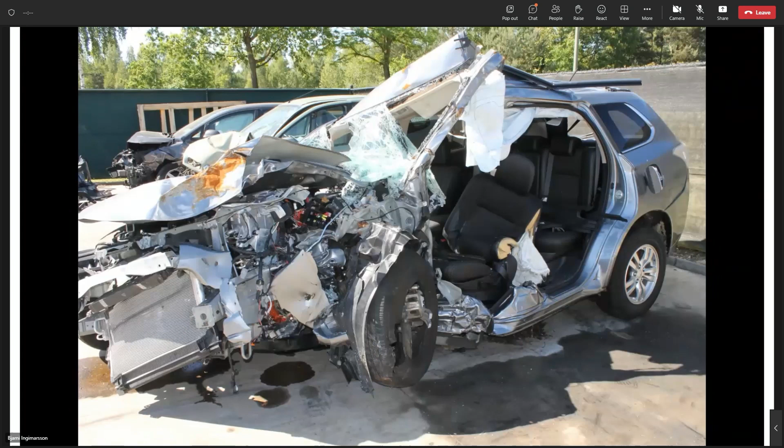What do you think? Are we ready for this, all of this?

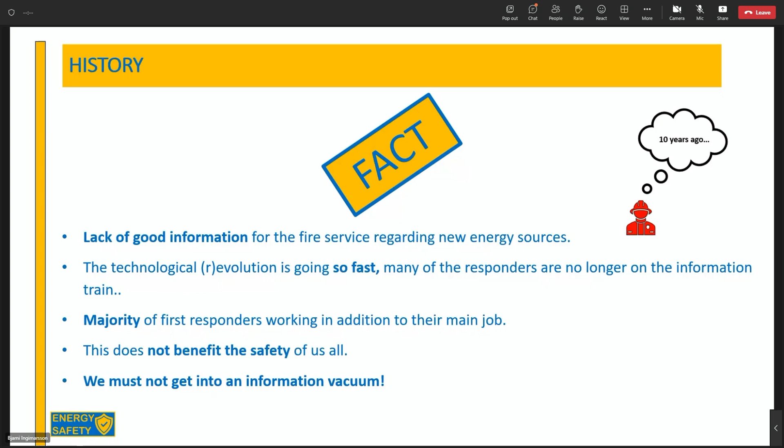10 years ago, I thought there's a lack of good information for the fire service regarding new energy sources. The technology goes so fast, many responders are no longer on the information train. So certainly the volunteer guys, they do their work as firefighter after their other work, so they have to be informed also. And that does not benefit the safety for all of us. This is not good. We must not get into an information vacuum, because that non-information will mean accidents.

So this is why my dream came to make one standard for responders. And who knows the rescue sheet and emergency response guides, do you know this, with those chapters? My idea is that we go to an intervention with one standard. Is it now an airplane, a train, a bus, energy storage systems? Everything in the same way, with the same symbols, with the same colors. This has to be, at the end, the purpose.

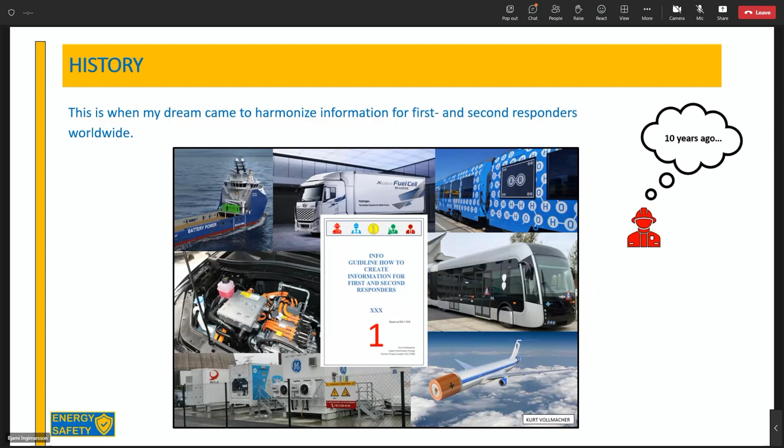And what has already been done? We have the standardized information by ISO 17840. These 9 chapters have been made as a responder thinks. If we go to an incident, what do we want to know? We want to recognize it, we want to know what it is. Then, if we know it, like a vehicle, how can we make sure this vehicle doesn't run away anymore?

That is still like a boat - how can we make sure it doesn't get away? A train, everything, it's always the same. And if we have done this, then how are we going to disable the direct hazard so we can do our work safely? If we have this, then how can we liberate the patients out of it?

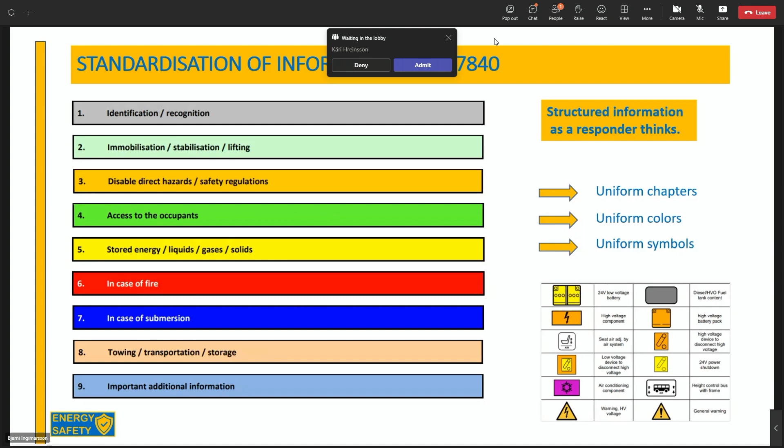Then what kind of energy sources are in it? What kind of liquids, what kind of gases, solids? What are we going to do in case of fire, what if this thing burns? And then, what if hydrogen is on board? What if methanol, ethanol? This is not normal, what's coming ahead of us. It's not only anymore gasoline and diesel, or electric, or hybrid. It's much more than that.

What about the case of submersion? I think you may remember what happened in the United States with all those electric vehicles that came in contact with salt water - a lot have burned. So what are we going to have in the future? A lot of rain, a lot of water. We have to be prepared for that also.

What are we going to do in case of towing, transportation, storage? What are we going to do with those vehicles if they have been in an accident, what are the dangers of this? And then in chapter 9, important additional information. We need to always have uniform chapters, uniform colors, and uniform symbols. Make it easy for responders, because it has to be easy.

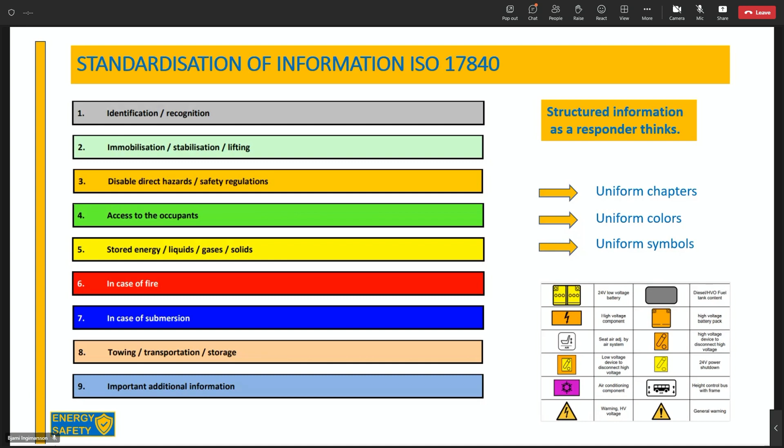The colors within the ISO standard are always the same colors. If you see orange in the rescue sheet, you will also see this on the cables. This is the same orange. If you see orange, you know you are dealing with high voltage.

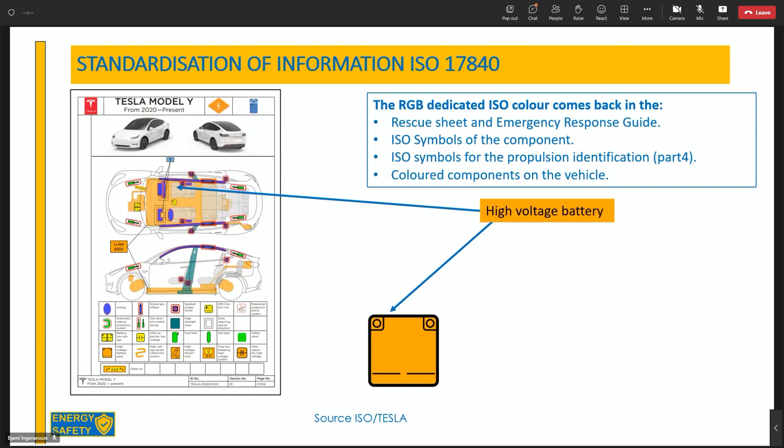The rescue sheet is made for quick information. When we made this at Euro NCAP, we said it must be not more than 5 pages, because you cannot read a book at the intervention site. You need quick information, but an emergency response guide has more in-depth information. What is the connection between the rescue sheet and emergency response guide? The chapters. If you want to know something, let's say chapter 6 about fire, you will find it in the rescue sheet very quick. Symbols, not much information. If you want more, you can go to the emergency response guide.

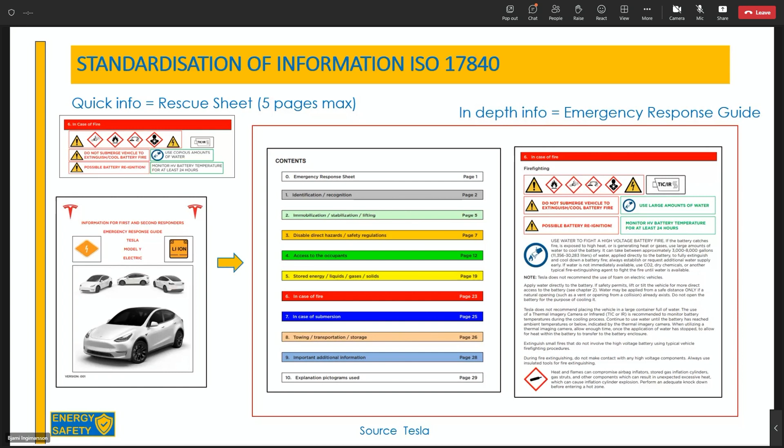I made this together with Tesla as an example to ISO, to show that it's possible to make a good rescue sheet and good emergency response guide. So this was an example. Then we have rescue sheets for cars, for buses, for trucks, always in the same way.

Okay, who knows these symbols? Have you seen this before? Who hasn't seen these symbols before?

When I made it, and my wife is here, I first showed them to my wife. And I said, what do you think of them? She said, I understand them. Then I know they are firefighter proof.

Because you have to make something simple. A firefighter has to understand it. And how it's built, the symbols have a background color. Gray is always diesel, red is gasoline, green is gas, white is cryogenic LNG, blue is hydrogen, and orange is high voltage. If you see one of those symbols from a distance, like an orange symbol, you know you're dealing with high voltage. If you see a blue symbol, you know you're dealing with hydrogen. If you see a white symbol, you know you're dealing with cryogenic gas. It's deeply cooled. Why white? Because it's cold, like snow. Blue is like water. It's tried to make it as easy as possible.

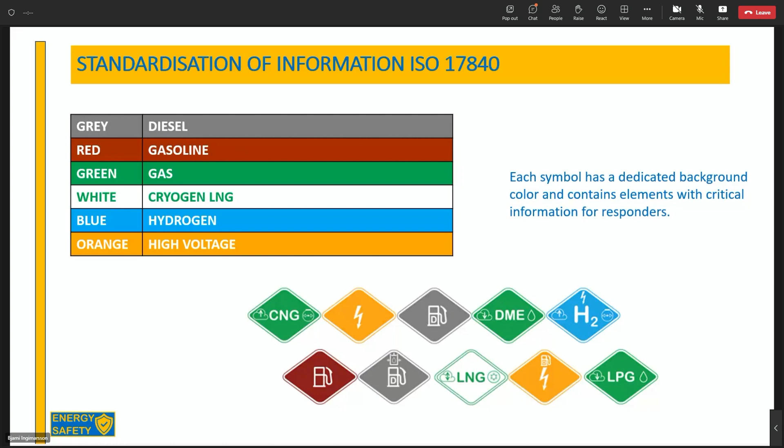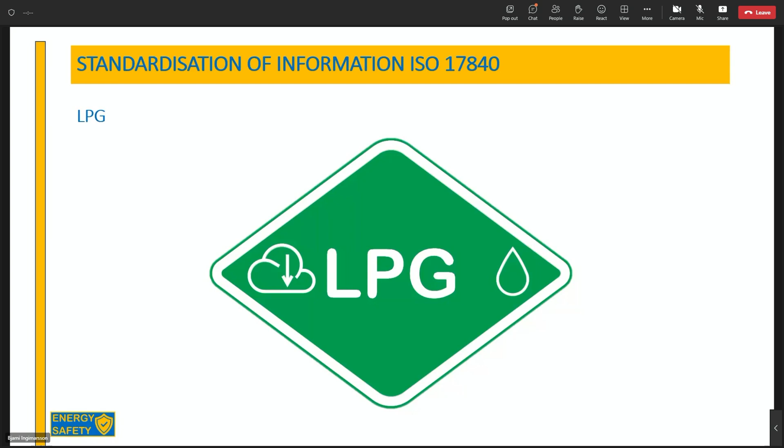Gasoline. Diesel. LPG has an arrow pointing down. Why this arrow pointing down? Heavier than air. And it has a droplet. Why? Because it's stored liquefied. So on the left you have the state towards air, and on the right you have the state of storage.

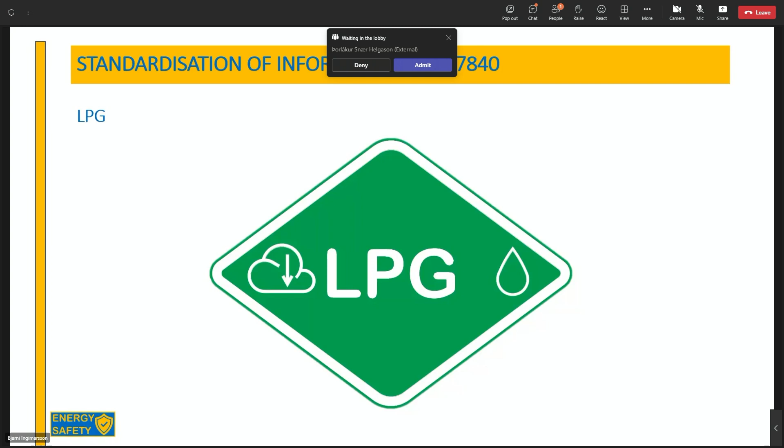CNG, again up, lighter than air, and then the other symbol - what should this mean? Pressure. Compressed, two arrows pointing to a point, compressed. Then we have LNG. Why should we have up and down? Depending on the state of the chemical. Yes, because if you have a leakage, it will come out in a liquid state, and depending on how much heat is on the surface where the liquefied gas comes onto, the quicker it will go up. So you will have both.

And then the cryogenic sign means it's deeply cooled. For LNG, it's minus 162 degrees. We already have liquefied hydrogen at minus 252 degrees. So this symbol applies not only to gas, but also hydrogen.

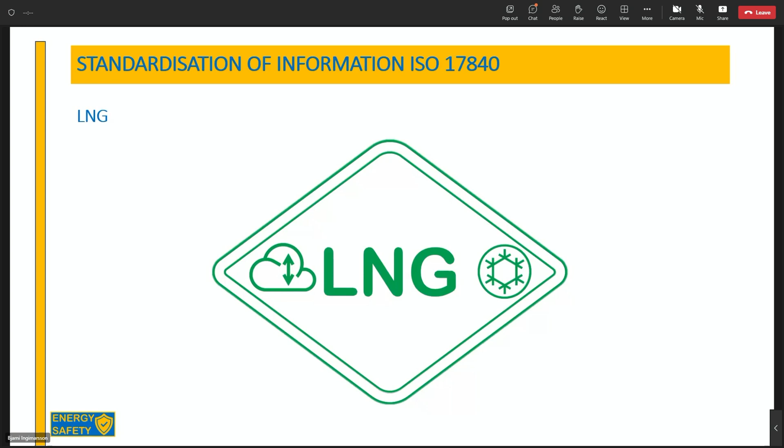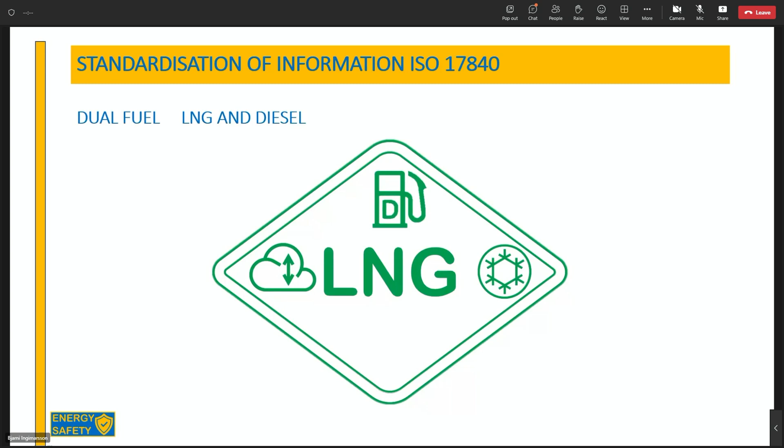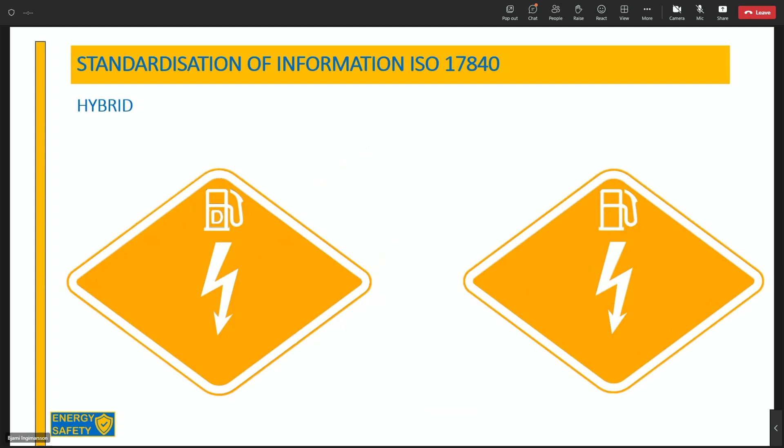And what is this? What should this symbol mean? Hydrogen, yes. Compressed? Electricity. Yes, electricity, because this is a fuel cell. What is a fuel cell? It means you can go to the station, fill up your vehicle with hydrogen, and within the vehicle there's a little factory that transfers your hydrogen to electricity. So this little factory makes your vehicle run on electricity by filling it up with hydrogen. So this is a fuel cell.

It means firefighters have two dangers. They have to deal with hydrogen and they have to deal with electricity. So in one symbol you see it all.

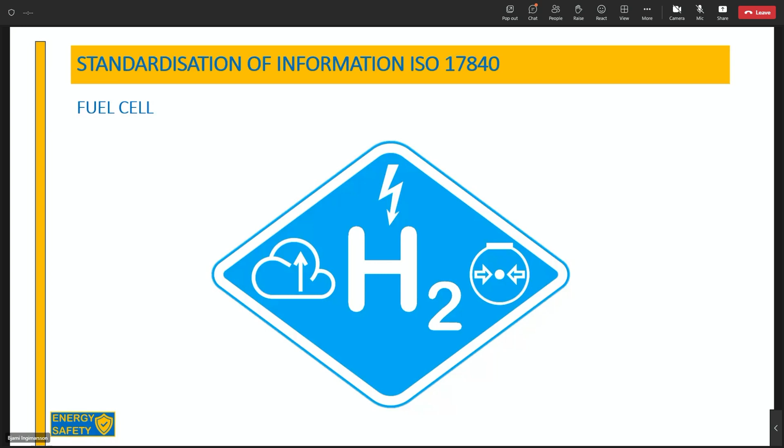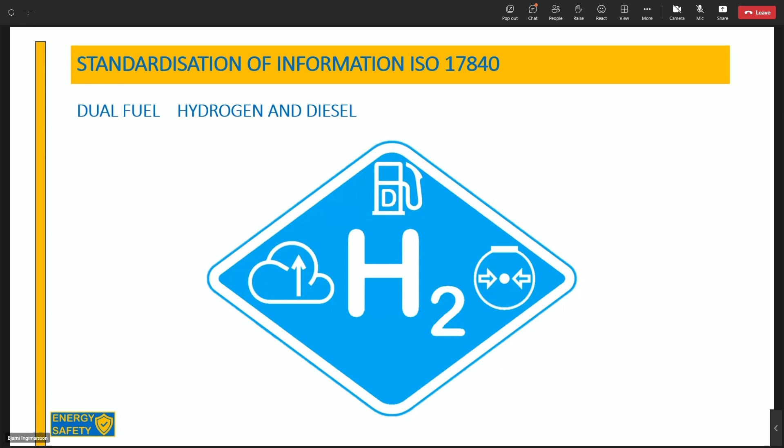Then the symbol is made so you can see from far away - if you see a green dot or a blue dot, you know what you're dealing with. The closer you get, the more you see.

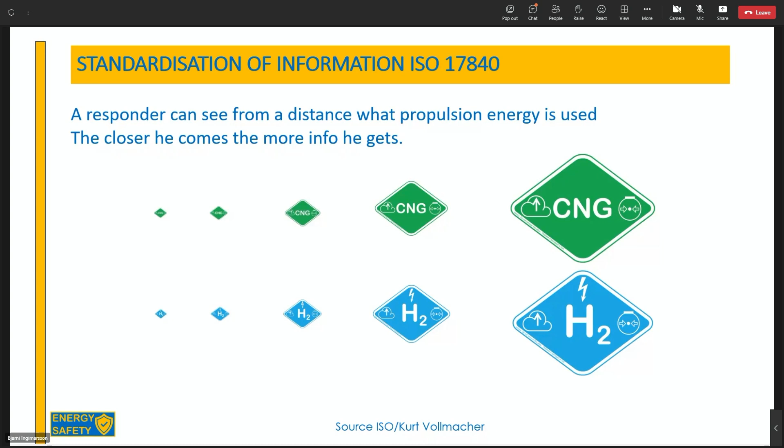And this is something we should also do in Iceland. I have seen you have buses on CNG. This is by my profession, I don't know, but the first thing I looked at was what kind of buses we have here. And this will be good for you, that you also have the signage on buses.

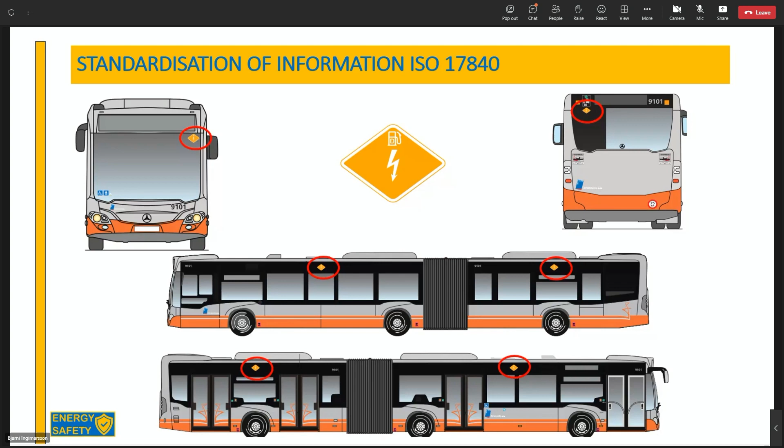We have done this in Belgium, and we have put the signage on buses in 5 places: front, back, the 2 sides, and the top. Why the top? For drones in the future. Because if this comes, a drone can fly away from your station to the accident, and it will send you the pictures or images from the accident to the command post. Before you enter the accident, you will already have the information.

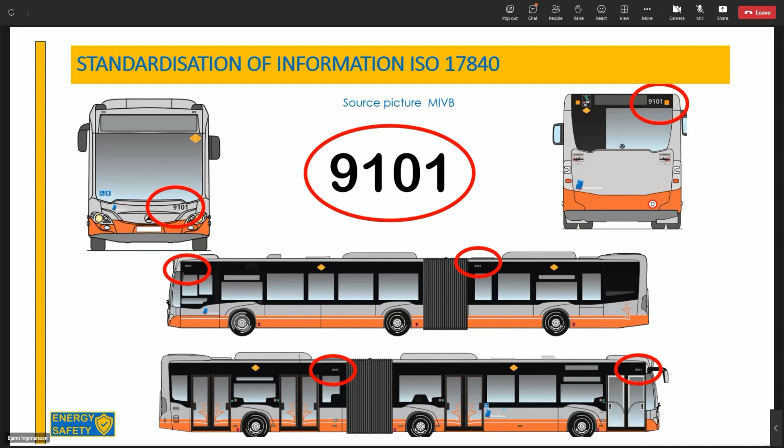Also, the number of the bus. Why is the number of the bus important? You can have the number of the bus connected to the rescue sheet. If you see the bus number 9101, you know, okay, this bus has this rescue sheet. Very important to know. This is what I mean.

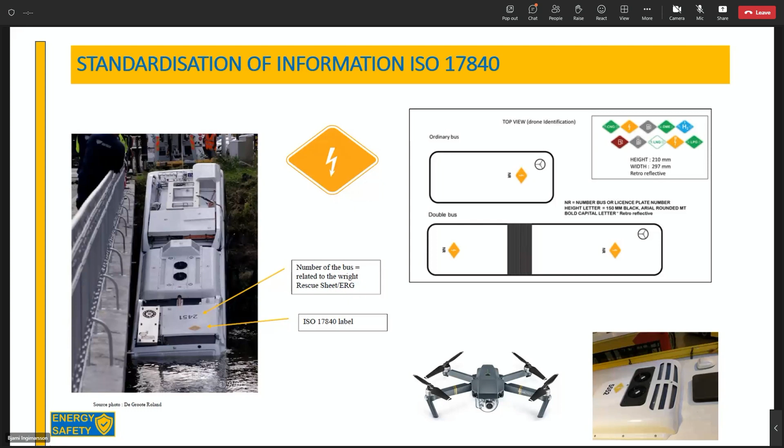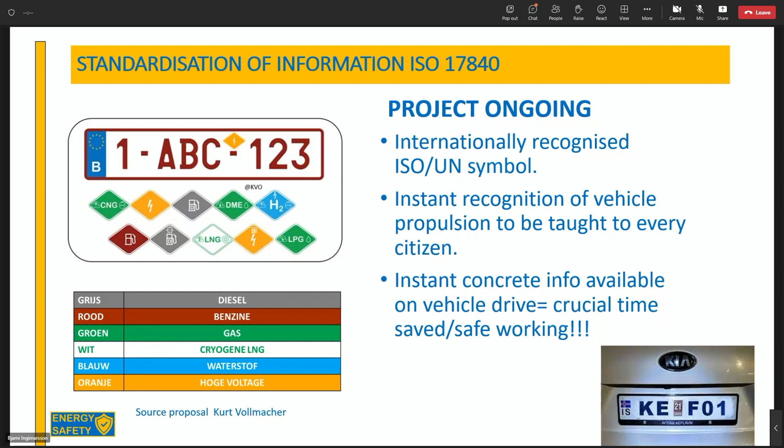And this is a project that we also try to do in Belgium: put the symbol on the license plate. I looked at this when I drove with the car over here, and I asked, what should be possible? Because there is not much space on your license plate to put the symbol on. But imagine this would be very good, because no one with a nice Tesla or a BMW wants to have a sticker on his car. No one. But if you can ask them, or the government asks, to put it on the license plate, maybe this is an opportunity to do something.

Euro Rescue app, I think most of you know this app. Do some people not know the Euro Rescue app? Most of you, I think, know it.

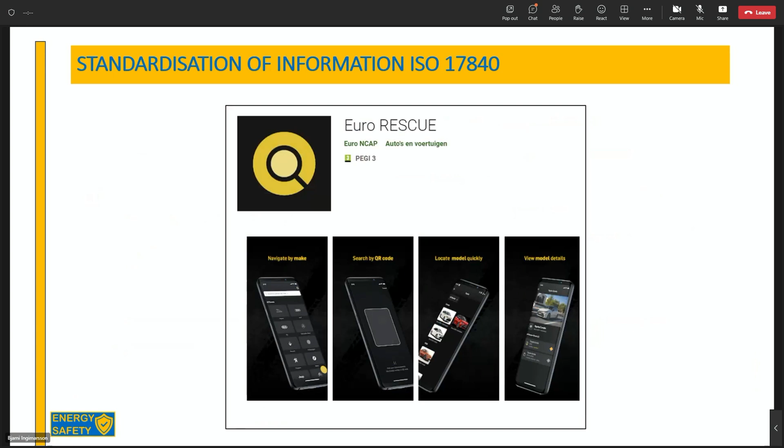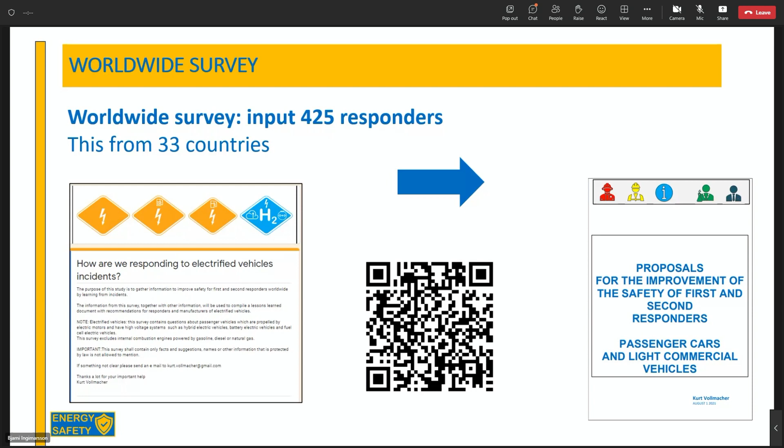A survey. I have done a worldwide survey with input from 425 responders. I also had good help from Bjarni on this. What were the conclusions? There's a need for clear recognition of the propulsion of these vehicles, so we need some symbols to indicate what kind of propulsion we have. There's also a need for uniform and globally available information on these vehicles, in accordance with ISO 17840, so we need standardized information about these vehicles.

A uniform, easy-to-operate disconnection system installed at the same place on all electric and other vehicles. So let's say if we could have a responder key to shut off everything with - this would be easy, but it's not so easy. But we try to make standardization in this way too.

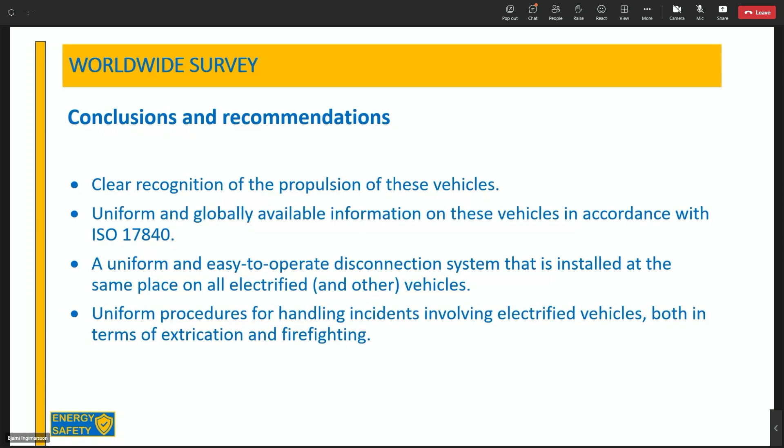Uniform procedures for handling incidents involving electrified vehicles, both in terms of extrication and firefighting. If a vehicle burns in Belgium, it's the same vehicle in Ireland, the same vehicle in the United States. It's everywhere the same. We can learn a lot from each other. This should be standardized.

Systems that make it possible to quickly extinguish the high voltage batteries of electrified vehicles - Perola has already talked about this. I will show you some things we are working on now at ISO to have standardization in this way too.

Safety systems and procedures to deal safely with high voltage stranded energy after an incident involving these vehicles. This is a very important thing you have to know. You can shut down everything, but in an electric vehicle you always have the high voltage. The stranded energy, this does not go away.

Let's say you put a vehicle somewhere for 5 months, and then you go control the high voltage again - you will still have high voltage. You can put it in the water for 3 weeks, and it's still possible you have high voltage. Be aware of this - this high voltage does not go away quickly.

The handling of electrified vehicles in car parks also requires treatment. I have seen the colleague - I said to him, it's everywhere the same. We need to think about how we can get those cars out of parking lots, because this is not going to be easy.

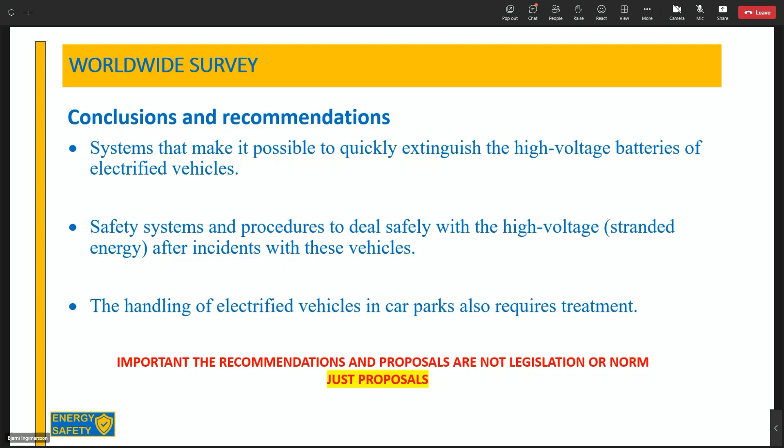Also important, these recommendations and proposals are not legislation or norm, they are just proposals. But we are working on norms.

These proposals are made to manufacturers in 10 languages. One very important thing, you always have to show a lot to manufacturers and maybe get something back. I was very happy that Audi has already taken over one of the proposals. They have already installed a connection to the battery pack where the responder can put an extinguishing agent into the battery.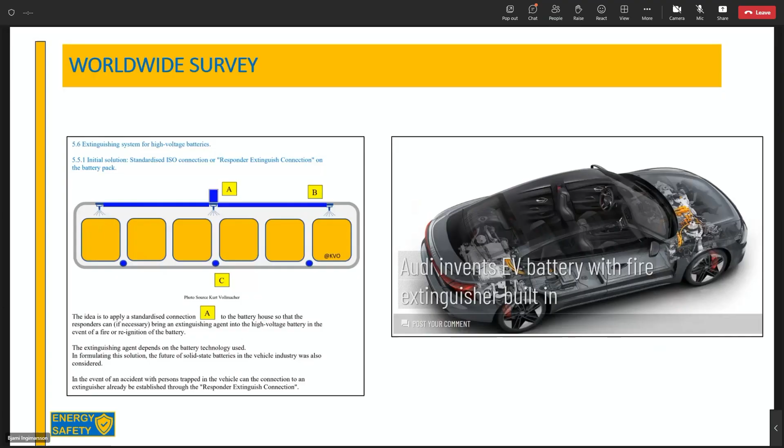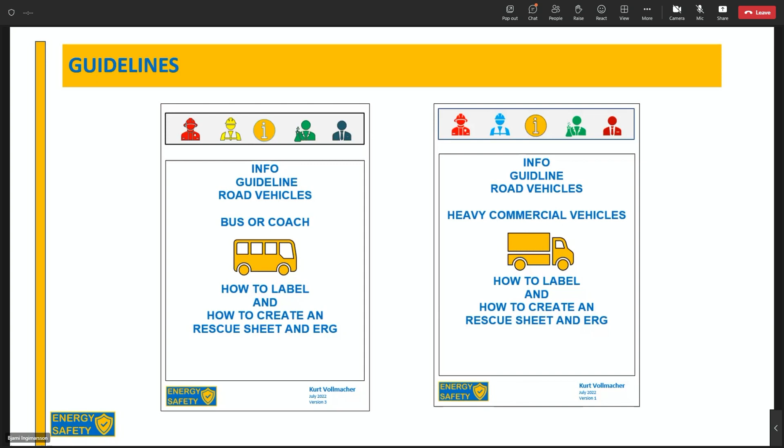So this was good, this was in the proposal, and Audi has already listened to this. There are 2 guidelines that manufacturers of buses and trucks can use if they want to make rescue information in line with 17840, so that you guys get the right information in the right way, with the right colors, with the right symbols.

Next step, what we are busy on: we are working with 7 working groups. One of the working groups, I'm talking also with Bjarni about this, is worldwide implementation of the existing ISO 17840 norm for car, bus, truck, and labeling.

This needs to be done in each country, also in Iceland. So what can we do with the existing norm to implement this in the country? Then there's a working group on energy storage systems, maritime vehicles, motorsport vehicles, air vehicles, railroad vehicles, and agriculture, construction, heavy machinery, and mining vehicles.

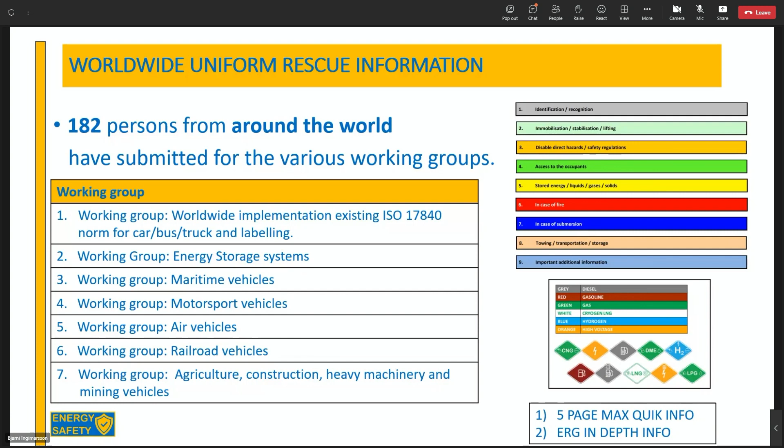There was a presentation of someone with machines, so there should also be a rescue sheet and an emergency response guide and labels, because we want to have, at the end, one standard: the 5-page rescue sheet and an emergency response guide covering all these things. Easy to understand, responder proof.

Next steps. There's a need to have a symbol also for 48 volt. 48 volt is not high voltage. It's like the system that we know, like start-stop systems. This is not dangerous for us for electrocution, but dangerous for us for having sparks.

Because if you cut into this, you can have sparks. So it's important to know this is not high voltage, but it's a vehicle where you can have a thermal risk from arcs.

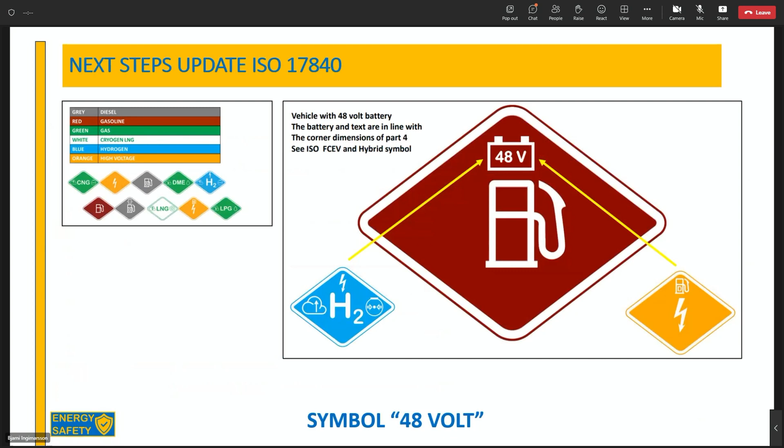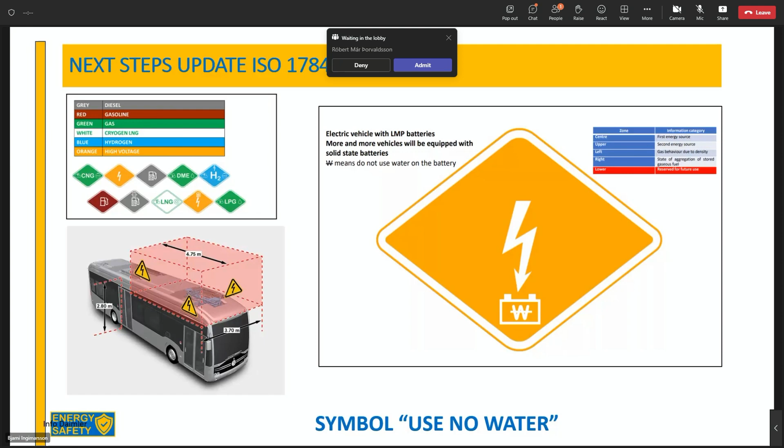These are batteries, not lithium-ion batteries, but vehicles running on solid-state batteries. Solid-state batteries have metallic lithium in them. Metallic lithium, if you put water on it, you have heavier reactions because it's an alkali metal. Sometimes they say a Tesla has lithium on it and will react heavily if you put water on it, but this is not metallic lithium, it's a lithium salt. So the only thing you can extinguish a lithium battery with is water, but not a lithium metal battery.

You will have reactions, but at the end, like I think you remember the picture of the bus in Paris. Do you remember it, with the huge flames coming out? This was a lithium metal polymer battery. What we're going to do as firefighters, if it's near something like a mall or something else, we're going to put water on it.

We're going to do this, but know that you can have reactions. It's the same as you have with magnesium. If you put water on magnesium, you have a huge reaction, but if you know this... it's not another fire, but you have to know what putting water on it is going to do. Maybe if this bus is in an open space, you can let it burn out. As Perola said, there's no one single procedure, there will be more than one procedure.

Liquefied hydrogen, I have told you about this - it's the same as we know from liquefied natural gas, LNG. This is liquefied hydrogen, and it's coming for trucks, heavy duty.

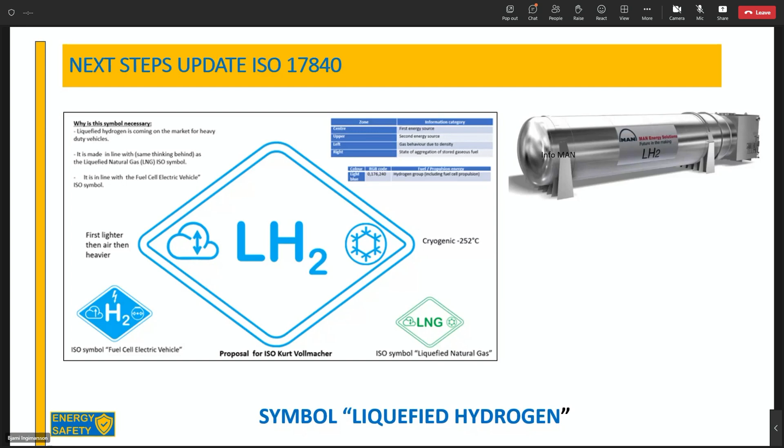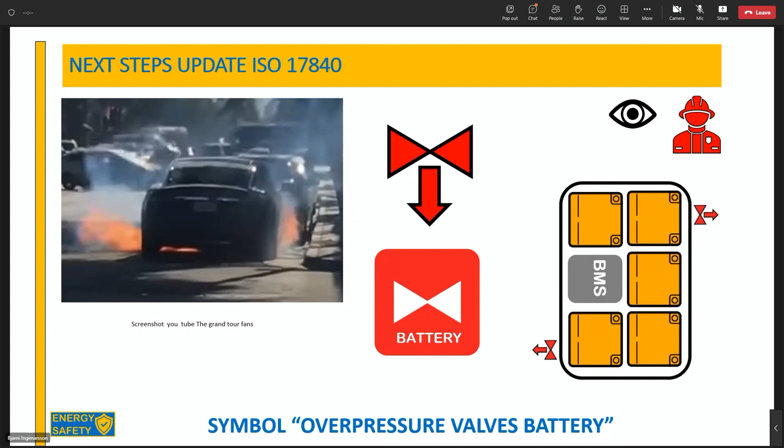If you know there are overpressure valves, don't go near them, but watch them. If you know an overpressure valve is opening, then you know you're dealing with a battery fire, and you can have reignition and other issues. You can have a Tesla burning that isn't a battery fire—it could be arson or a short circuit on the dashboard—but if it's not reaching the battery, it's not a battery fire, it's an ordinary vehicle fire. So this is important to know.

Also, can I penetrate the battery or not? Perola said they are busy with that, and I was very happy to see this investigation, because we are working with ISO to make new symbols. It would be good if the manufacturer puts on the rescue sheet whether you can penetrate the battery or not, and if you can, where the safe places are. For example, you can mark with a green spot on the rescue sheet where you can best penetrate the battery.

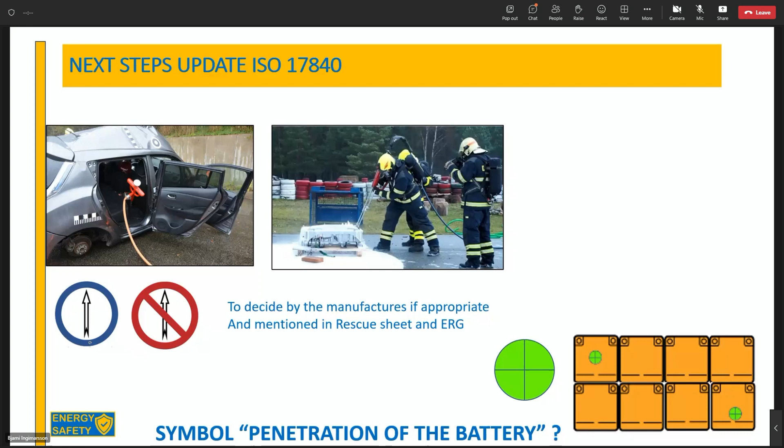Then, can I submerge my vehicle or not? Tesla says they don't want this, but all the manufacturers say you must do this. It's not up to the commanding officer to decide what has to be done—I'm very scared of having lawsuits against the fire department in the future because of how you handled a vehicle. No, the manufacturer has to say what we have to do with their vehicle. We are firefighters, so we make sure the incident is controlled, but we don't care about insurance—we care about safety. This has to be clear to everybody: responders do their work to make it safe.

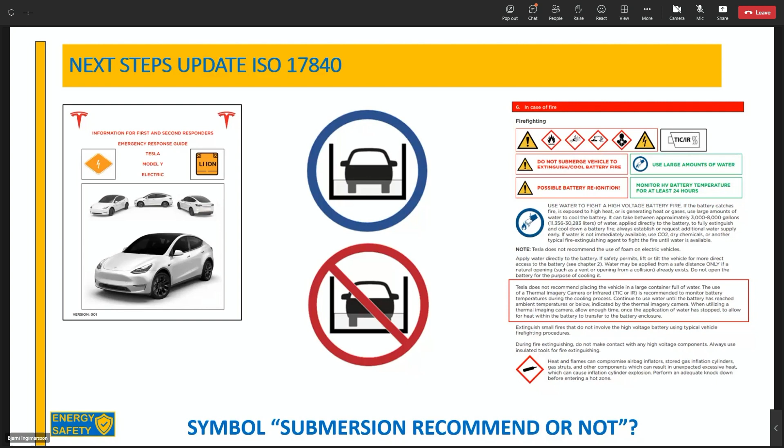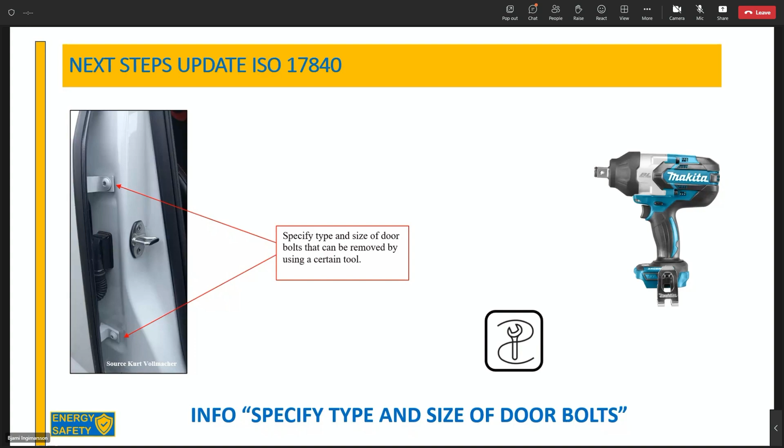This is also a technique we use in Belgium. You can get the door off with a spreader or a scissor, but if you know the bolts of the door, you can just remove them with the machine. We use this a lot—we look to make place for removing the bolts, then remove them, like from a truck. This is very easy and doesn't put a lot of heavy forces on the vehicle, because it's just removing 4 bolts.

So how many countries have this labeling on their trucks already—buses, fire trucks? I think Belgium and Finland are working on it. As I've said, Transport for London is going to put them on all their 9,000 buses, so it's getting more and more common. If we ask anybody to put symbols on their truck or anything else, and those symbols aren't on our own firefighter trucks, how can we ask someone else to do it? So we've put the symbols on all our fire trucks and ambulances at our station, to set the good example. This is the best thing you can do—you give us responders the first step. It's not easy, but it's something you have to do worldwide together.